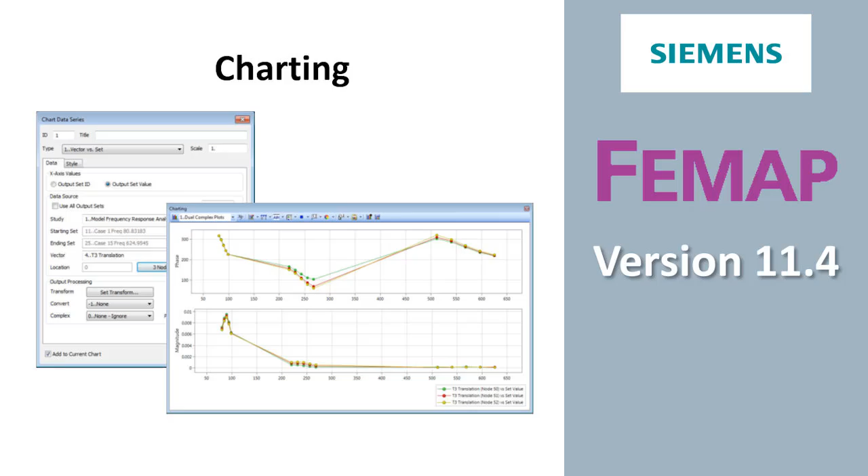Welcome to Femap version 11.4. In this video we'll be looking at some of the new charting enhancements.

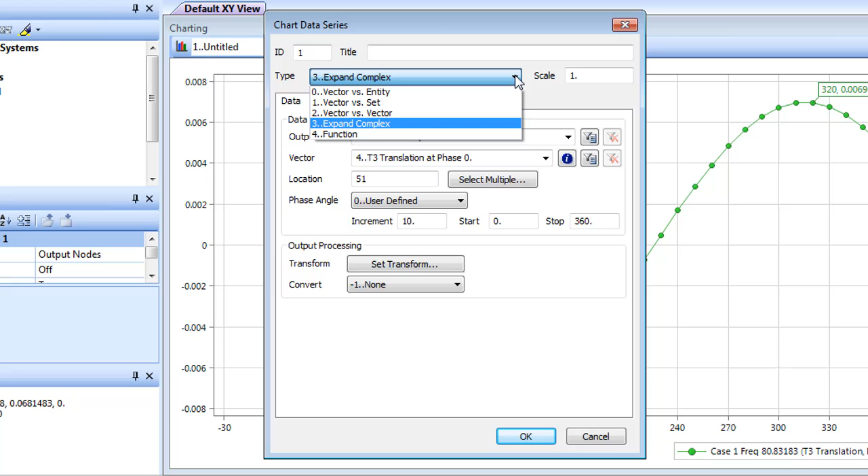In Femap's charting capability, the charting user interface has been updated. Specifically, the chart data series dialog has been streamlined to show only the most relevant information. You can use the Type drop-down to specify the type of data series to define, and this will determine the options that you'll see on the Data tab.

The Style tab, however, remains consistent for all data series types. With this update, clutter is reduced and chart definition options are easier to find and set up.

Femap allows you to perform real-time output processing, and we'll see how you can use the charting capability to process data on the fly, eliminating the need for any manual data processing. In this test model, we have von Mises elemental stresses in the results, and we'll convert those data to nodal output for the line of nodes along the top edge of the model and plot the results in a chart.

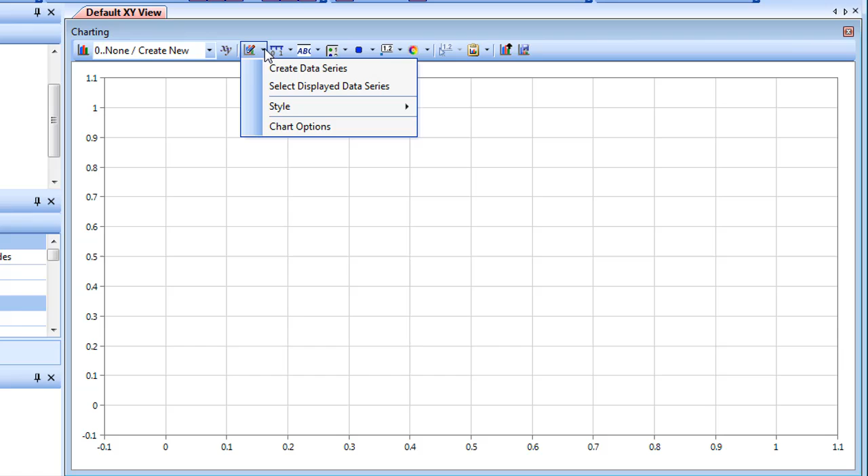So let's activate the charting pane and create a new data series. In the Chart Data Series dialog, we'll select the x-axis values in the global coordinate system and pick up the von Mises elemental stress vector, set processing to average, and select the top edge nodes group for output display.

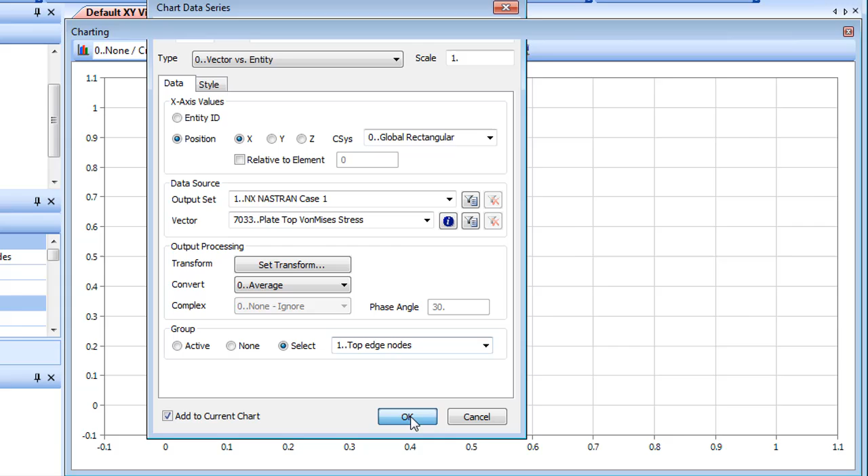The resulting chart shows nodal data along those top edge nodes converted from the elemental results, showing how easy it is to convert output data on the fly in Femap.

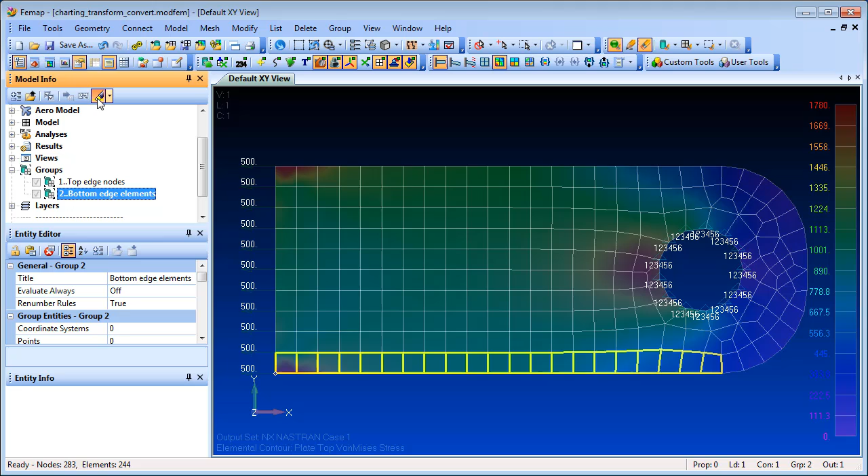Similarly, Femap can perform data transformations on the fly, and we'll see an example of this using the same test model. This time we'll transform plate X membrane forces from a line of elements along the bottom of the model to the global coordinate system and plot them on a chart. As before, we'll activate the charting capability and create a new data series.

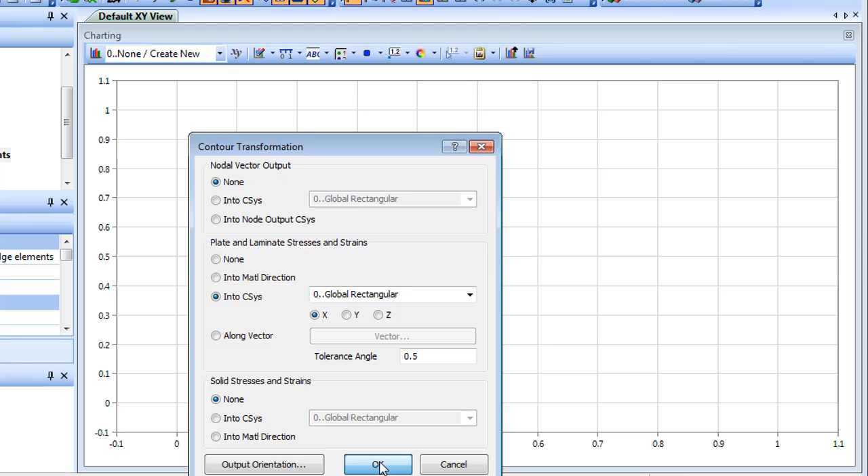So selecting the x-axis values, picking up the plate X membrane force output vector, this time we'll set a transform and elect to transform to the global coordinate system and pick up on the element group along the bottom edge of the model. The resulting chart shows X membrane element forces converted to the global coordinate system.

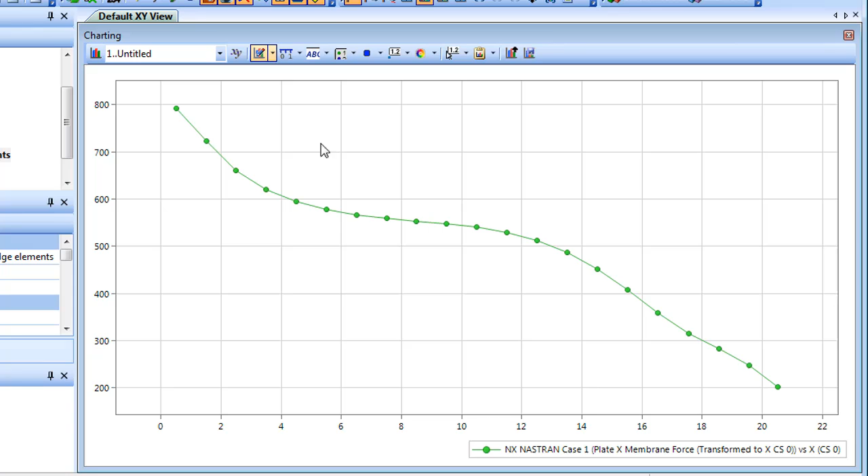Now, just for comparison, we can also go back and create another data series and select similar input, but this time without any transform, and we'll see the element data in its original form with the output relative to the element coordinate system, which is dependent upon the order of element connectivity with the nodes.

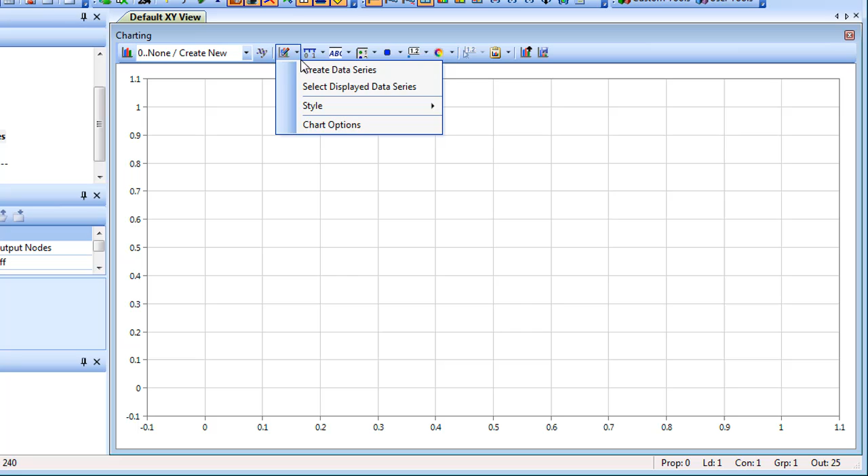Double complex data plots are available in Femap, so a secondary plot of phase angle can be shown alongside a plot of magnitude. Femap automatically retrieves complex data based on the selected vectors. To see how to set up a double plot, we'll use a simple test model that has already run a modal frequency response analysis. So let's activate charting and define a new data series of type vector versus set, opting for the output set value for the x-axis values.

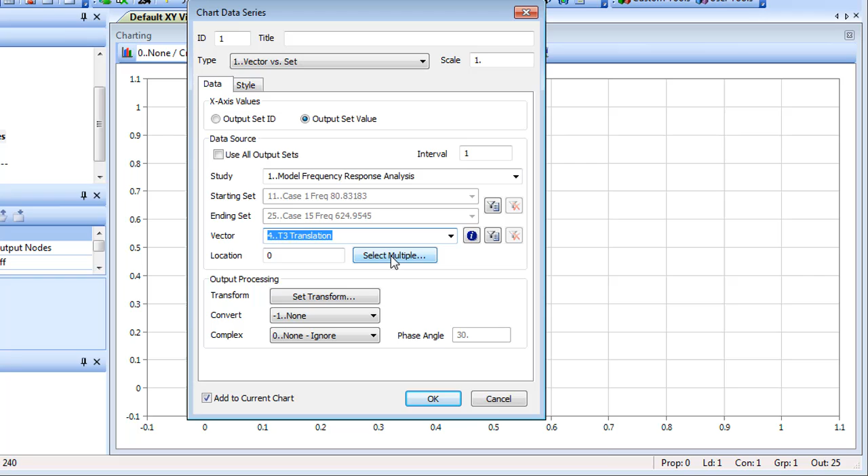We'll just use the single output set for the modal frequency response analysis that's already completed, and the T3 translation of the three output nodes which are located on the right edge of the model. Femap then generates the magnitude plot of the selected output. Selecting chart options will allow us to set up a double plot with phase at the top and magnitude at the bottom.

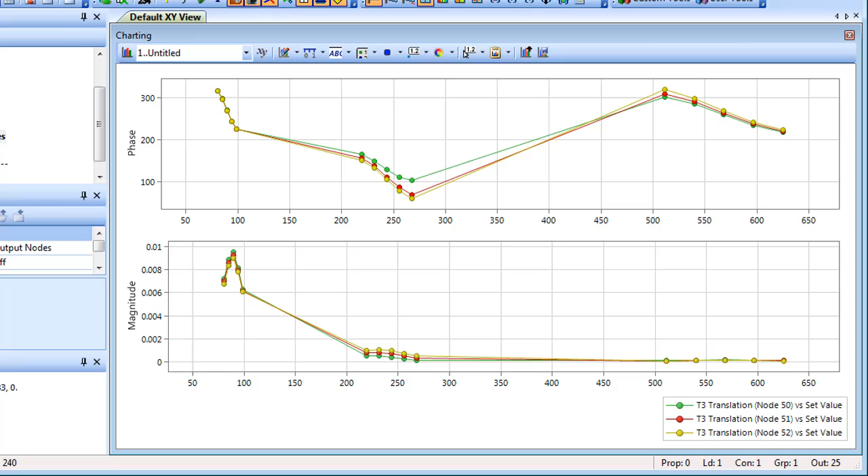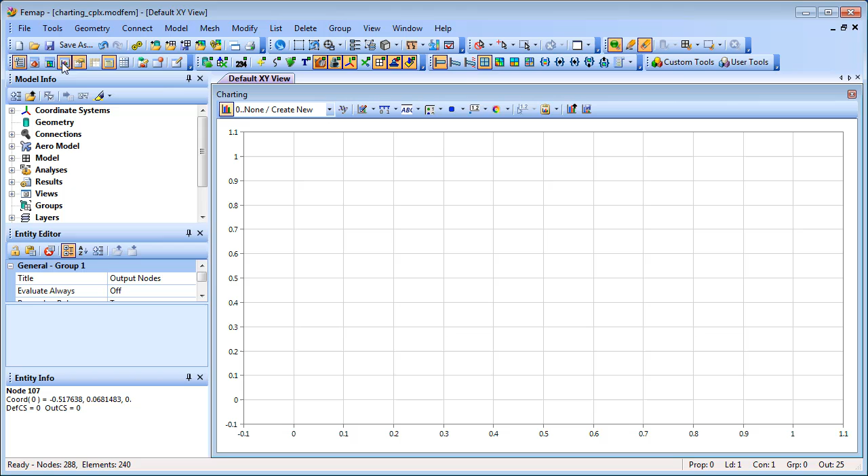Femap can expand magnitude phase data according to a user-defined interval via the complex expansion data series type. Let's see how to set this up using the same frequency response analysis test model. We activate charting and select a new data series. This time we'll select type 3, expand complex.

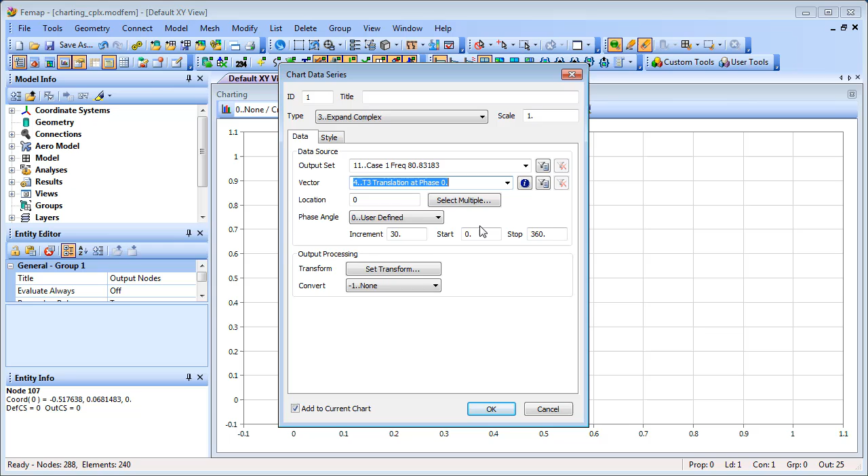For the data, we'll select the first case and the T3 translation. The output target is node 51. And we'll specify a 30-degree phase angle increment for the plot. The resulting chart shows an expanded plot for the selected vector at all phase intervals. This makes it much easier to identify the max-min peaks for the selected output.